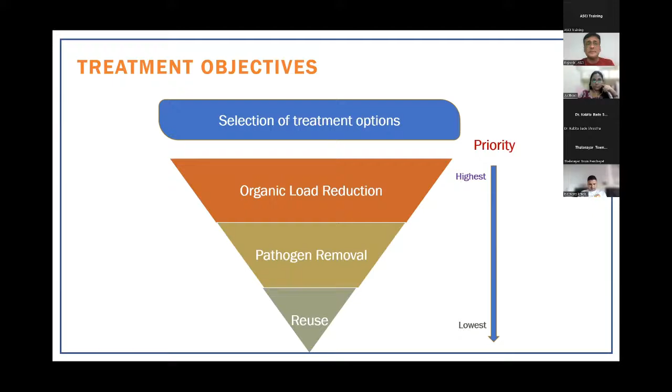So these are some of the things we look into. On performance, we look at water and solids, whether on the technical side they meet discharge norms or reuse standards. At the local context, we look into the characteristics of the sludge, then the dewaterability based on solids concentration and stabilization, designing the dewatering mechanism, the frequency a treatment plant would receive loads, and how much time it takes to completely treat after receiving a load.

If the treatment system put up is robust enough to take up all the climate changes. Land availability, we know in urban contexts, is quite a challenge, so how much land footprint would be required for a plant? And finally, what would be the end use? How will I use it? What will I do with it? That should be the ultimate goal when designing a fecal sludge treatment plant.

Talking of O&M requirements, how much human power and human resources are required, what will be the cost, and how much skill set each person working in this treatment plant would require. And then finally comes the investments, the O&M costs, and the affordability for households and the ULB to bring sludge into the plant and make it functional.

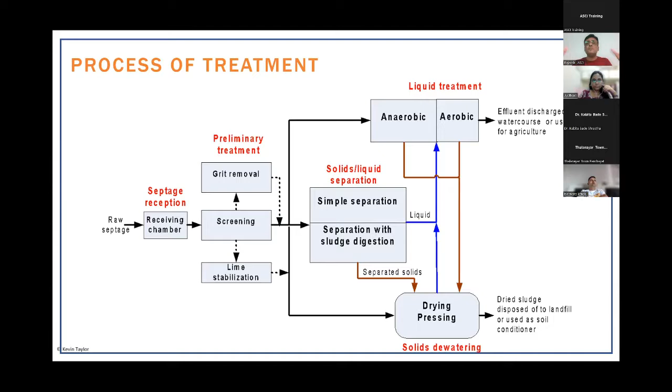It could be anaerobic, aerobic, chemical, or anything else. The solids separately will go through a chain of events where they would be concentrated, moisture content brought down, and rid of pathogens, so they can be used as soil conditioners.

That's the basic scheme whenever we design a fecal sludge treatment plant. Now, there are several processes we'll discuss today: settling and thickening tanks, geobags, Imhoff tanks. These techniques help in the dewatering process.

Post the dewatering, as it comes to treatment of the water, there are several processes: aerobic processes and anaerobic processes.

And then when the solids come up, they need to be treated. Heat drying could be done, composting could be done, vermicomposting could be done. Simple but effectively designed sun drying could be done, so that pathogen reduction is achieved in the biosolids.

Finally, the dried sludge or biosolids can be used as building materials, or for energy, biogas. But in the Indian context, we generally prefer to look into the agricultural context, where it can be used as a soil conditioner or manure.

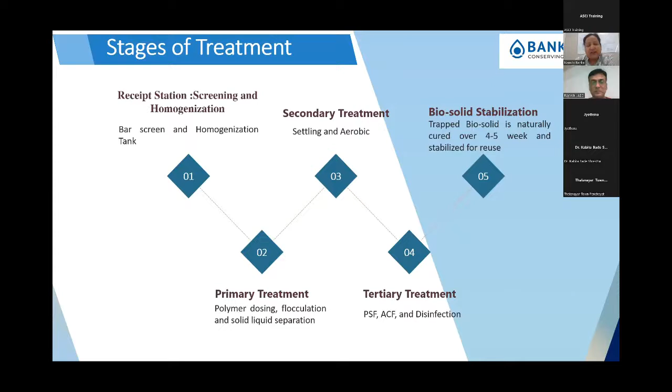So that we do, and then this whole material is passed through the geobag, where effective dewatering happens. This is our flow chart. This is the sludge, and when the water comes in the geotube, it gets separated into two parts: the solid is retained inside the bag, and the liquid is discharged outside and collected in a tank.

So it's collected in the tank. Then after that tank, the water comes out, we take it for treatment using different methods and different units that we have, where somewhere we are using it aerobically. We have tried SBR, we have tried normal, simple treatment. I'm sorry, you'll have to excuse me for my throat today. So this is what is happening when the water comes out.

We have tried different technology, aerobic and mechanical processes to treat, and we have seen that we are getting very good quality water, which is being reused in our system. Then finally we pass it through ACF, PSF, and filters to use it for our own purposes.

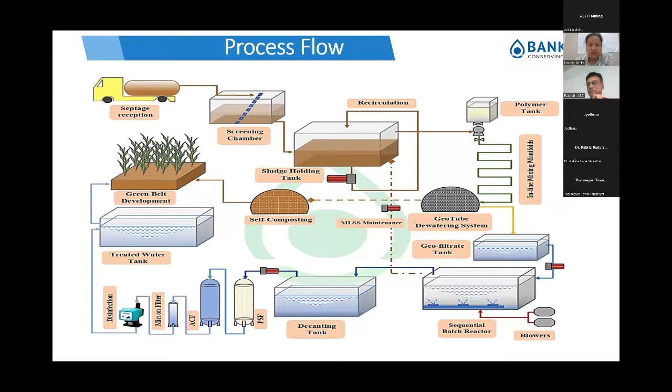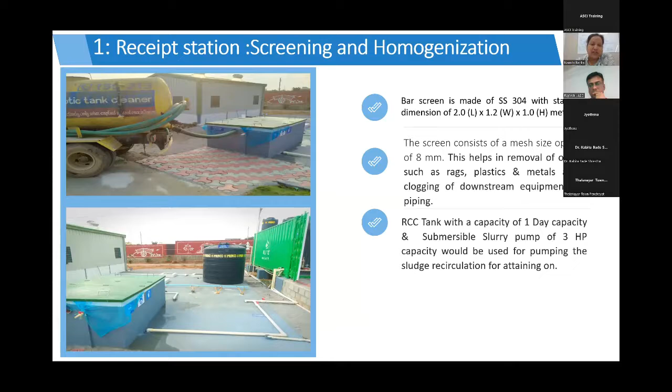We don't have anything separate when the waste is pumped through the pipe; the dosing has been done, and we call it a zigzag or anaconda kind of design, where the flocculation happens meanwhile while it is being pumped, and then this whole material is pumped into this geobag. This is how it looks when it is pumped: immediately the separation happens, the effluent water comes out, and the solid retains inside.

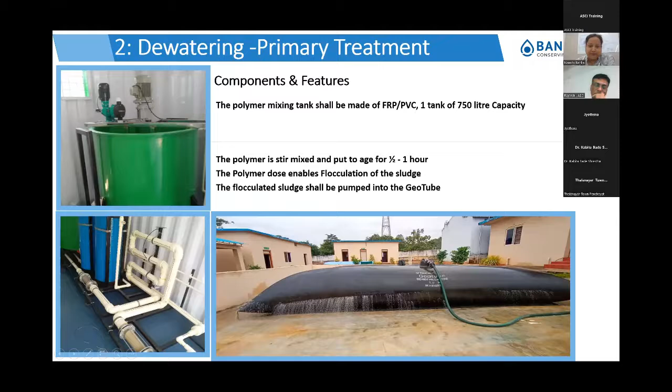Now we have started and upgraded our SBR secondary treatment. The reason is that before we were allowed norms of 30 BOD or less, but now since the norms require bringing it down to 10, we have installed a very simple SBR system, which helps us reduce the BOD, COD and maintain it below 10. It also helps us in maintaining the nitrogen levels.

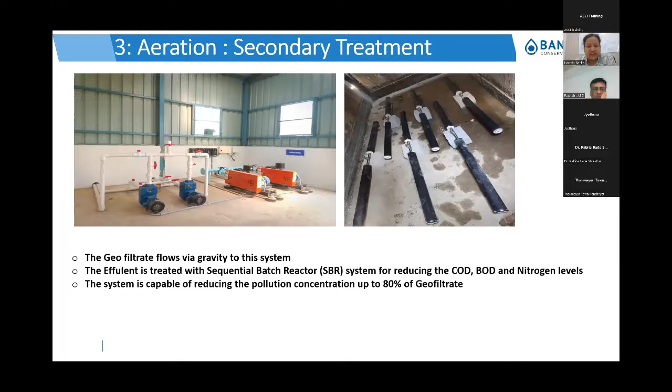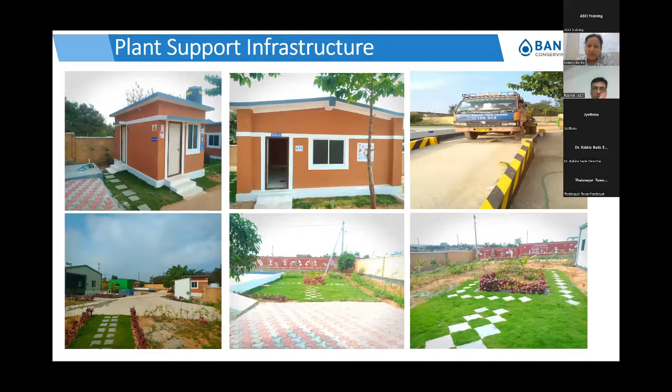So after 6 to 8 weeks, when we open up the bags, this is how it looks - completely dried solids. This solid is in a very hard rock form, so we pulverize them to a smaller size of 3mm to 4mm particles, pack it, and distribute.

Most of it has been distributed till date. We have almost generated 150,000 kgs of these solids, which have been 100% given away for free around the community, because we believe if we are able to develop the community along with what we are doing, it thrives better.

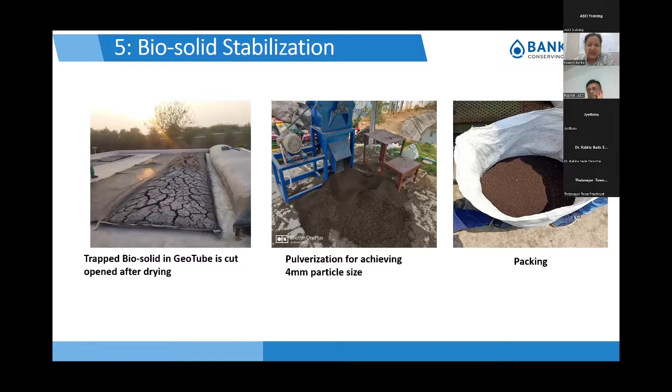And we have also used it in our own plants, where we have grown some kind of vegetables, which are very, very evident. If any one of you visit, you can get a first-hand feel of these vegetables and fruits and other things that we are developing.

So the very salient feature of this technology is that it's very scalable. There's no odor at all. The geotubes are sometimes said to be the only constraint, but we feel that's not a constraint, because something or the other has to be consumable. So the geotube can be resold - we have resold them. Discharge norms can be met very easily.

And I feel that because the requirement of electricity is so low, we can install it anywhere, even where there's a shortage of electricity. And the operation is simple, where we deploy local people locally - we don't generally send them from Hyderabad.

Installation time is very low. Here in Hyderabad and Telangana, because of so many kinds of infrastructure required, it took us 3 months. Otherwise, if you don't want all that, we can do it in 1 month to 1.5 months.

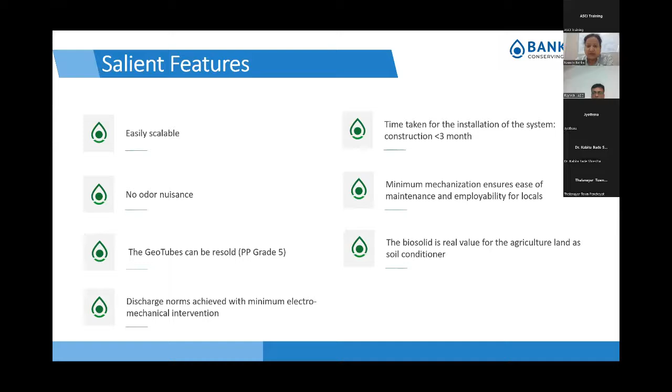So the biggest part of this technology is the USP - it can handle incoming septage of any shock loads. That means there is a lot of solid variation that we have seen in the last 4 years.

We have seen solids coming as low as 1% to solids coming as 8%. That means sometimes it's very old septage from septic tanks, which we cannot refuse to take. Despite that, we have been able to manage them, and we have not yet returned any vehicles.

With 6 or 7 of them running right now, we have almost taken 2,500 trucks in these plants and treated almost 5 MLD of waste.

It's 95% removed in the primary treatment itself. Our incoming BOD average has always been around 15,000 to 20,000 BOD, which we reduce immediately by geotube to 95% or more.

So this is a challenge that this geotube can handle, and it promises me to do that.

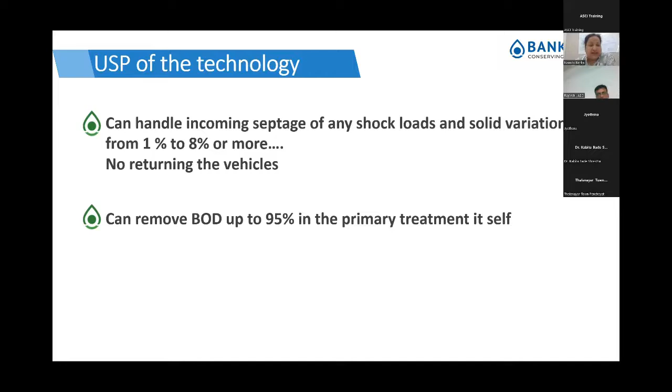So we have 8 plants in operation, 5,000 plus kiloliters have been treated. And the effluent, which we have used, is 3,500 kiloliters, which we used completely in our garden - we don't buy any water from outside. And 150 tons of biosolid has been distributed and recovered.

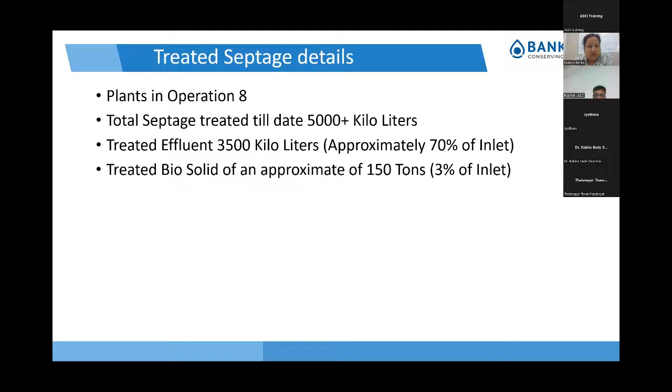So the efficiency is very clear - COD is definitely less than 50, BOD is less than 20. Why are we saying this? Because the SBR is recently installed in one of the plants where we are trying to bring it down to 10, and most probably we'll succeed in doing that. TS is 1%, SS is less than 50, and pH is maintained at 6.5 to 8.

Of course, we have done a lot of tests, a lot of studies, and had a lot of visitors across India and abroad visiting our plants. And we have a lovely plant in Bodopal, Hyderabad, which is very close to the city and beautifully running.

So just to give some background about the company, we are a public limited for-profit social enterprise providing sanitation solutions to one and all. We call ourselves an integrated sanitation solution provider, from containment to the reuse or resale of the fecal sludge solids. We have been doing it.

We were incorporated on 31st August 2012 in Hyderabad. Of course, I'm the founder, but we have a lot of team members who help me do all this. We have been a member of many recognized global organizations, and some of our directors have been part of these organizations, taking them to the next level, and giving a lot of presentations across.

We have 900 employees pan-India, because we do a lot of business with Indian Railways. We have offices in Hyderabad now, and we have 6 regional offices across India. We are a public listed company and are trading.

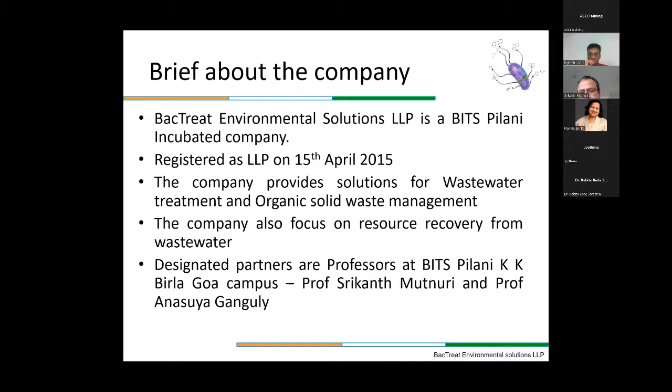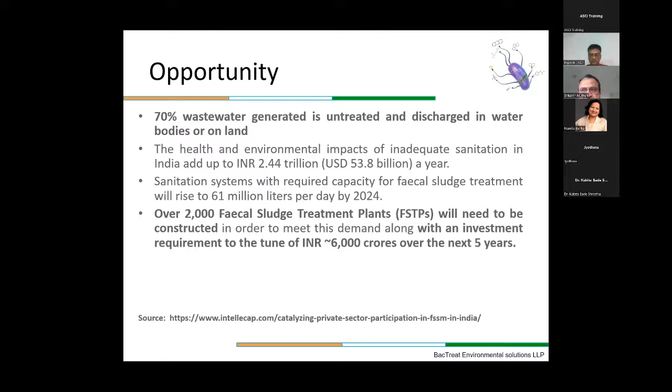Now, urine is rich in nitrogen, phosphorus and potassium, as well as the feces. And that comes in the wastewater, which is the focus of our work, to trap them as nutrients. Now our way of producing manure is a little different, so it's a better quality manure than the regular organic manure.

Even though it is in the same region, when people looked at what was done in those days, like carbon dating and other analysis, scientists found that the way waste was disposed in the Amazon region was different, and they brought in some additives into it. All the waste was added in a particular manner, including fecal matter, dead bodies, and organic waste - everything was dumped in one area. Then they brought in some broken earthenware and ceramic units, and some bacterial cultures were also found in that.

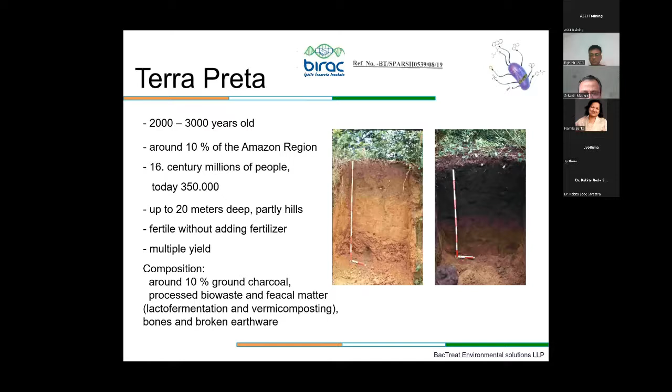And we consciously took a decision of not using electricity or any type of running motor, etc., because we wanted the system to work in any conditions, and we rely mostly on the gravity base.

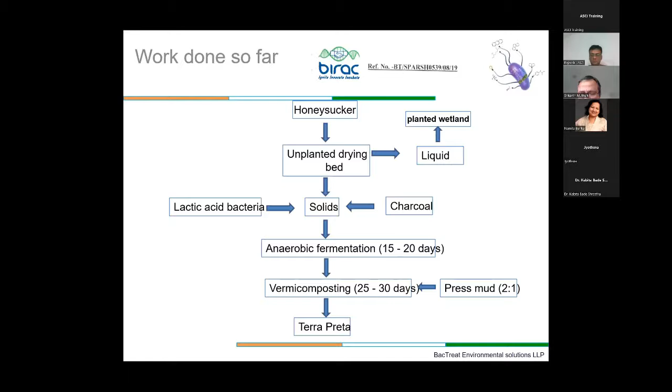So the honeysucker or the septic tanker comes in, they pour it in an unplanted drying bed, the liquid and solids are separated, then we go in for a sort of fermentation which we optimized, and post optimization we go in for vermicomposting. And then we do some additives, and then we make it a rich compost. I will show you the video of how it is done.

And we follow this terra preta quality in terms of the different parameters to match with the fertilizer control order, as well as we look for the heavy metals in it. So we match that all the parameters match with the fertilizer control order, and this is how it looks.

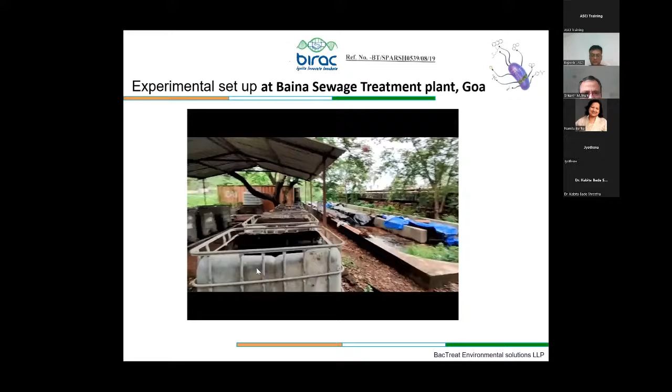This is a plant which manages one septic tanker per day, which is 8,000 liters per day. We have been operating this for 2 years, every day one septic tanker.

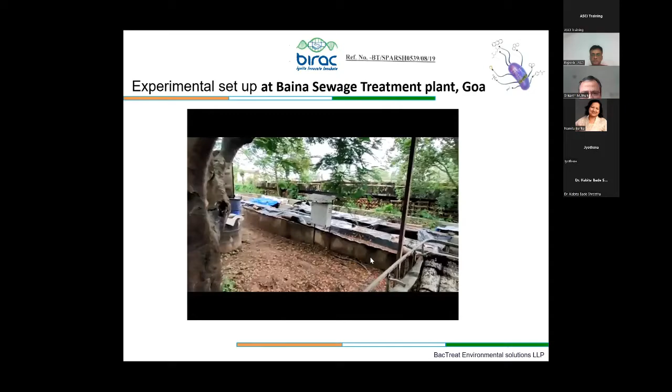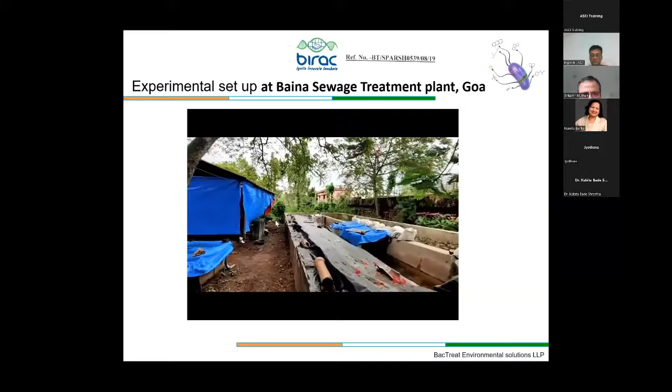So these separates and the solids are composted in these black color sheets. What you see is the composting bins underneath. And the video was taken during the rainy season, that's why you see the covers hanging. And so these are the composting bins, and those packed bags with the compost are there.

And this is a unit where the end product compost is sieved and bagged. And behind these are the composting bins.

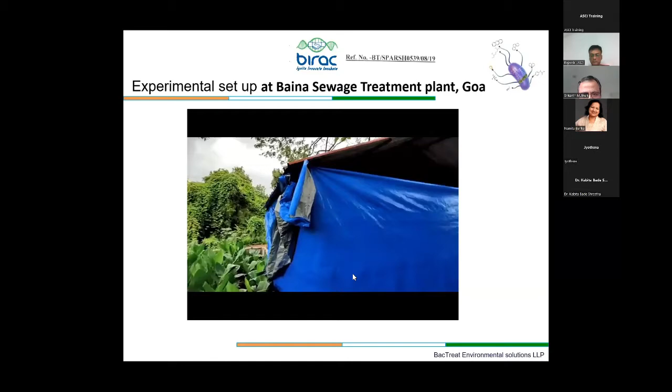And this is the vertical wetland which treats the water. So our wetland system has an advantage that it occupies lesser area compared to the other wetlands, because it's an in-house developed vertical flow constructed wetland compared to the horizontal systems. It occupies less area.

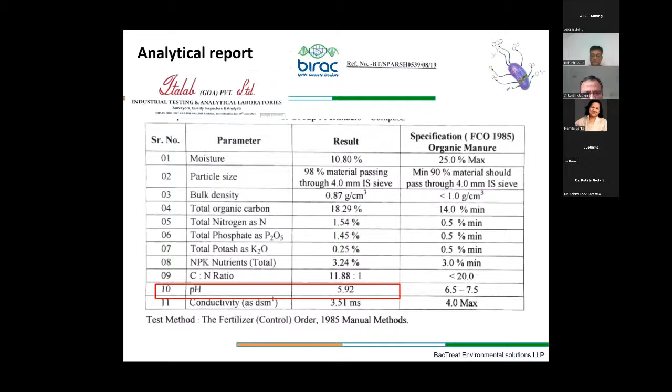Then we look at the different parameters and we see that it matches the FCO order. For example, here if you see the pH is low, because of that your potash is low. So then we go in for an addition of ash into it, to bring in the potash, and which will adjust the pH as well.

And so the cost economics is about 5 rupees for compost production. And the COD parameters are well within the discharge standards, and the coliforms found towards the end - we do hypochlorite addition towards the end, but we modified that according to the situation. Like we integrated in one condition a UV disinfection system. In some cases we have integrated an electrochemical based disinfection system. And here in this case, we rely on the hypochlorite system.

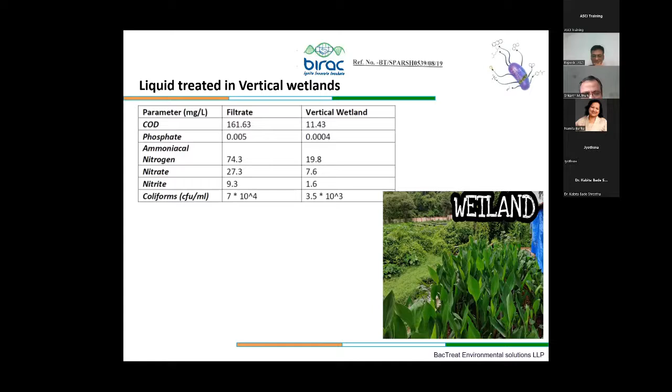So we did further studies. All these are BIRAC sponsored ones. We are into the field now.

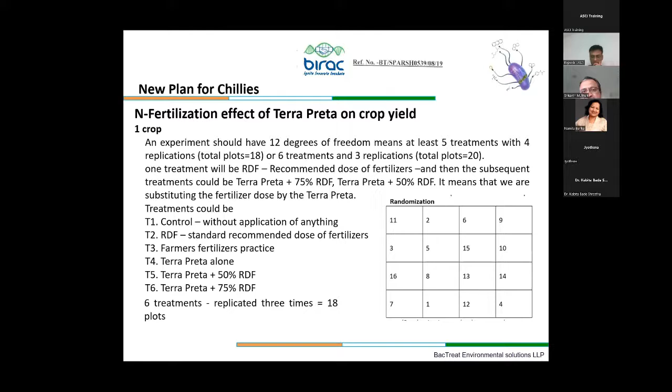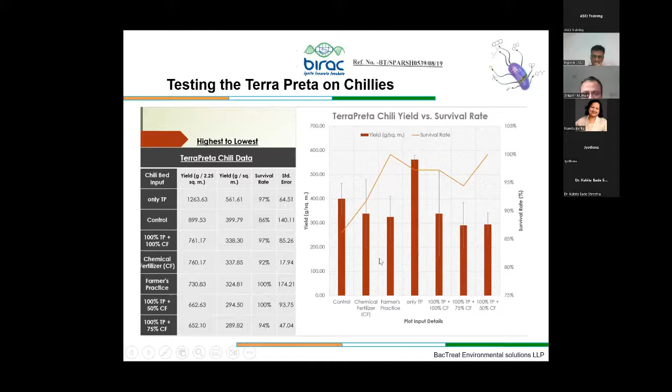And what we have done is we tested the compost that is produced. As I said, we have been operating that for now almost 2 years, and every day 8,000 liters of septic tanker content is processed, from which we get roughly about 300 to 500 kgs of manure. So we tested it on different plants - one is chili, as you could see. Then our terra preta, the middle one, you could see that performs better in comparison to chemical fertilizers or farmers' practice.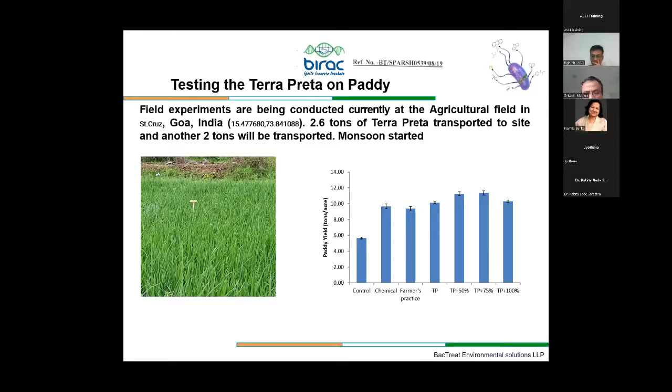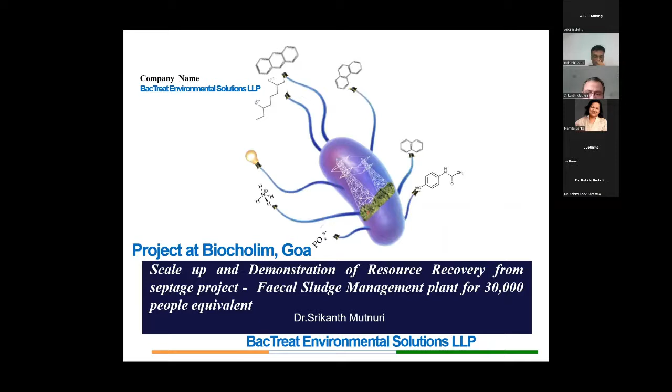So we did these crop studies with our manure, and we constantly monitor the manure quality. Now we've scaled it up to manage 15 septic tankers per day in another municipal council in Goa, the Bicholim Municipal Council. We can install this anywhere.

So this is the inauguration of our 15 septic tanker per day unit with Bicholim Council. Let's see this, so that's the whole unit, and let's look at this part.

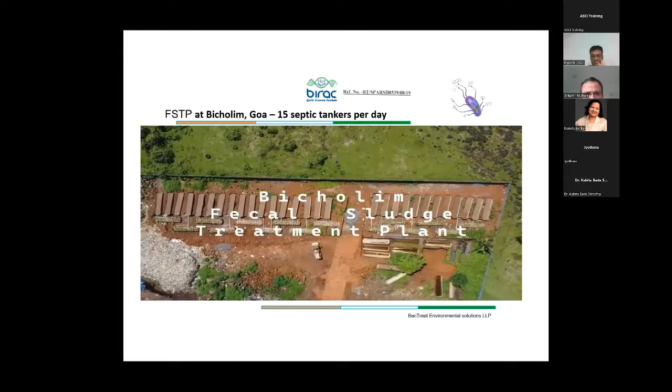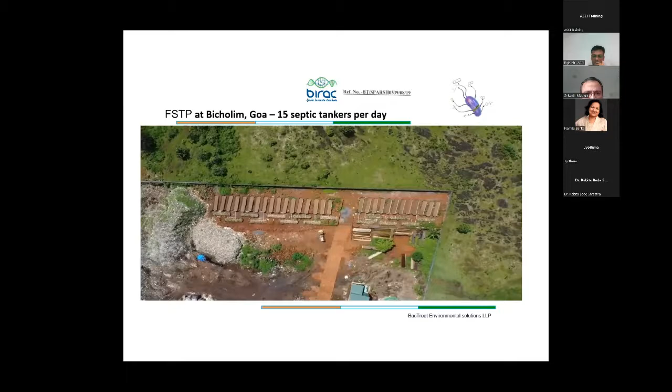So that's the 15 septic tanker, 90 to 120 cubic meter per day unit. This whole area is Bicholim Council's municipal solid waste treatment plant, and they gave us space there, which we're using for our treatment unit. So the septic tanker comes in.

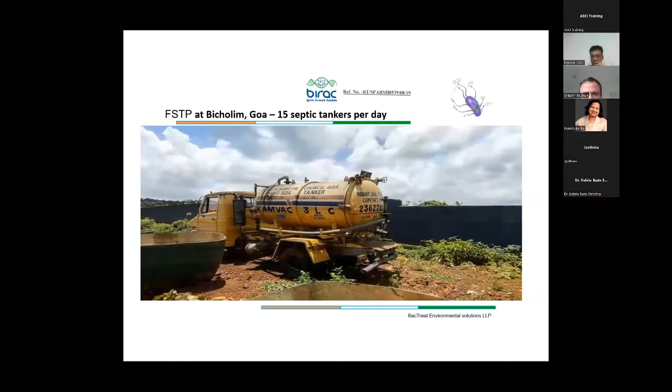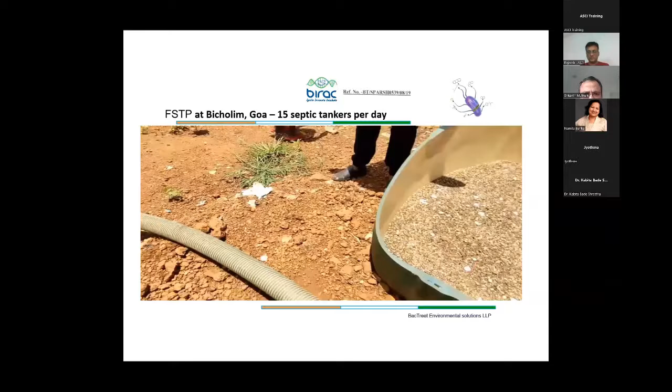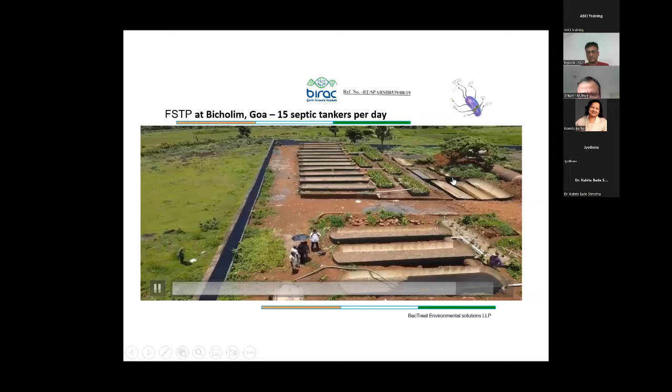They discharge into these unplanted drying beds, and the green color you see is the wetlands. After separation of solids and liquids, the water gets treated in the wetland and then goes further. The black color is the solids, and the plants treat the water, and then there's a collection tank of water.

So that's the gist of what we do with the fecal sludge management, and I'll be happy to take questions.

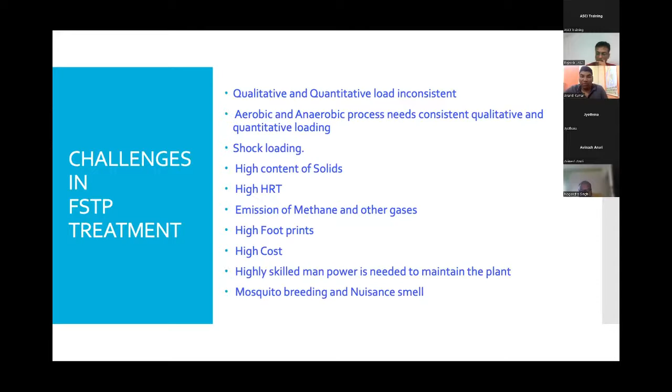At the same time, it required high HRT, meaning high footprint. Cost was incurring high. To maintain such plants, I was requiring highly skilled manpower. Mosquito breeding and smell was another challenge.

So to counter all these challenges, we came with a solution: a screw press dewatering machine followed by electrocoagulation. This helped me to treat the sludge immediately, and it can handle a wide range of qualitative and quantitative loadings. If there is no load, no problem. After a week, if I receive a tanker, I can just switch on the button and start the treatment.

If the BOD or organic content is high or low, absolutely no problem, because it has got nothing to do with bacteria initially. So that has really solved bigger problems. I require very less footprint, and in the entire treatment process we are not generating any kind of gases.

We are also integrating the entire system with solar and wind renewable energy, helping us make the whole system independent of power and grid. The treatment is completely green because we are not emitting any gases. It is cost effective, and I don't require highly skilled manpower to operate such a plant. Ultimately, no smell in the plant, and the treatment can be done under a clean and green environment. This is the solution we came up with to achieve this.

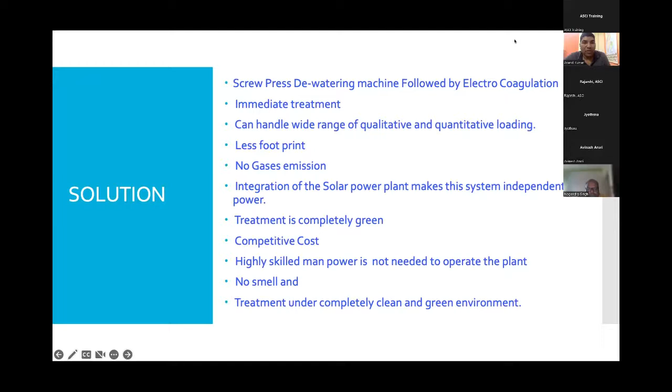To achieve this, the process we followed was like a screw press. Next slide for the process flow.

So this is a screw press where we feed the sludge inlet. You can see there is a vent nozzle, the sludge inlet. From there, the entire sludge can be taken, and we can separate solids and liquids. There is a filtrate outlet and a sludge outlet. These are the two outlets. Solids come out from the sludge outlet, and liquid comes out from the filtrate outlet.

The features are: we can start the treatment immediately after the decant. Solid-liquid separation can take place instantly. All discrete particles present can be removed immediately, the same day, the same hour.

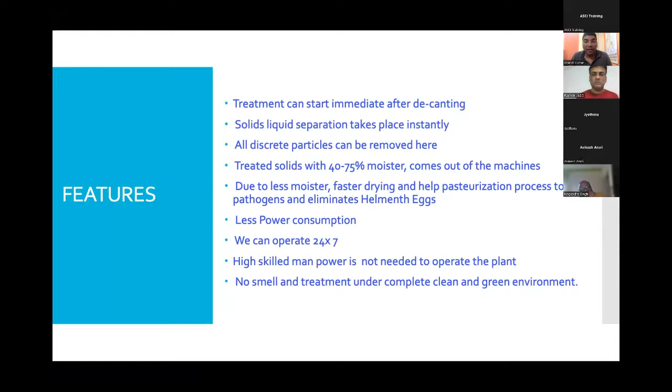Whatever solids come out of the dewatering machine have 40 to 75% moisture, and due to the less moisture, drying can be faster. It helps the pasteurization process, killing all the pathogens and eliminating the helminths. It requires very less power, and we can operate such a machine 24/7. To operate it, highly skilled manpower is not required. No smell is there, and it can be treated without any gas emission.

After that, there is an electrocoagulation system. The water which comes out of the dewatering machine goes into electrocoagulation. That water is already free from all the discrete particles.

The only constituents present in the wastewater are at a very micro level, and they have a bond with the water. For these constituents, electrocoagulation helps in breaking the bond and separating all those suspended solids which we cannot see with the naked eye, through electrocoagulation.

Here we have two different kinds of electroplates. We provide DC supply to the plates, which leads to ionization within the water. Due to this ionization, the release of metallic ions and electrons react with the constituents, and that breaks the bond with the wastewater.

The moment it breaks the bond, it starts coagulating. With respect to its density, if it has less density, it floats over the surface; if it has high density, it precipitates and forms sludge at the bottom of the tank. So we have a mechanism to remove the floc and the sludge. We can drain these two things in parallel and take those solids back into the first tank so it can go through the dewatering machine again.

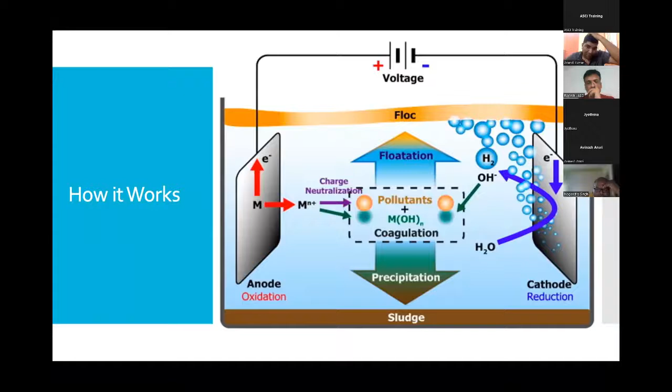So the features: as I already mentioned, the treatment starts in situ, and after the dewatering machine, the water can immediately go into the electrocoagulation system and treatment can start. It breaks the bonds between the constituents, the pollutants, and the water, and it kills all the pathogens. The water comes out treated because we are giving DC potential to the water, so it kills all the pathogens.

We have a provision to drain the flocks and precipitates, so all the solids can be brought back to the first tank. High COD, BOD, TSS, nitrogen, and everything can be treated conveniently. It is completely independent of shock loads, with no smell during the treatment.

It has a wide range of applications. We can use medical waste liquid, industrial waste liquid, along with fecal sludge. So we are the ones who treated fecal sludge with electrocoagulation.

This technology is very old, already existing in the industry. Mostly it has been used in medical and industrial applications. We are using it for fecal sludge applications, and we have made certain modifications and upgradations that have given fantastic results.

This system can also be integrated with IoT, which helps in monitoring the parameters and controlling the flow.

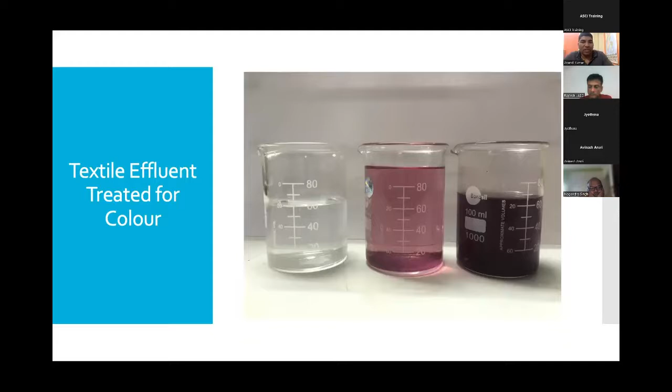This is how we have seen the treatment. This is another application, not for fecal sludge, but even in dye applications we have seen good results.

This is how a smaller unit looks, with a little higher capacity.

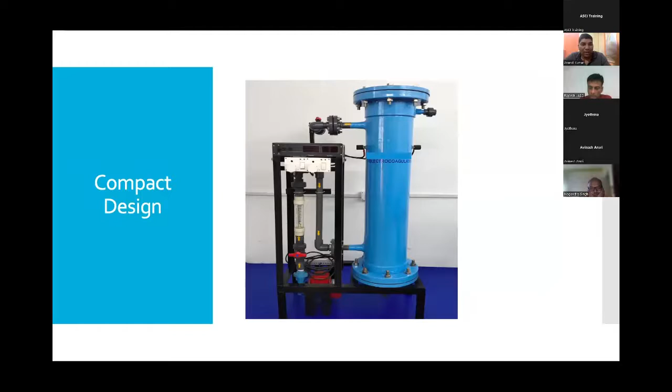This system can treat very small volumes, very compact. This can treat up to 1 cubic meter per hour.

After electrocoagulation, to build confidence in the water quality, we have a contingency in all our plants with an MBBR plant, which I have not displayed since it is known to everyone. After MBBR, the water passes through carbon filtration and sand filtration, and again we have UV for additional disinfection of the water.

We have been operating these plants in various places like Khammam, Nalgonda, Aiza, Gadwal, Mahbubnagar, and Palamner. Everywhere we have experienced very good results.

All solids being treated in the pasteurization process, we have seen, are completely free from pathogens and helminths.

Right now, whatever solids we have been producing, the municipality is taking and using them for local plantation. Whatever water comes out of it, we are using for in-house gardening purposes.

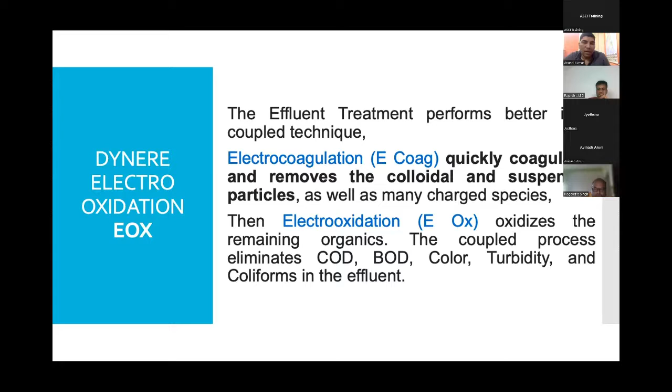I hope I am clear on electrocoagulation and the dewatering machine. Please let me know if there are any queries. Thank you.

There is a question from Mr. Nagendra Singh: can this electroflocculation work on grey water to remove dissolved detergent and other cosmetic items used at the household level?

Yes, we have tested this as well. What we have seen is that whatever detergent and cosmetics are present are also removed. We have tested that and we have test reports and all. So yes, it can be done.

The next question is, what is the cost of the treatment unit per KLD, and what is the O&M cost per KLD? A rough estimate, if you could give.

If we keep it very specific to the treatment, not considering support infrastructure and all, machine to machine, the maximum is about 3 to 3.5 lakhs per KL, max.

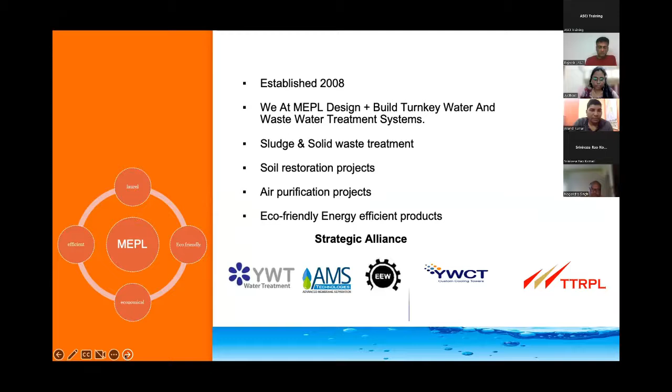That was the IoT and other things we have implemented. Ma'am, you just keep going down so that... yeah, Avinash is handling the slides. Okay, Avinash, you can go to the process.

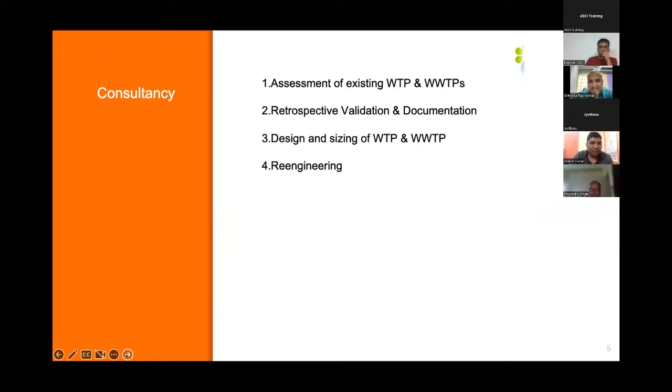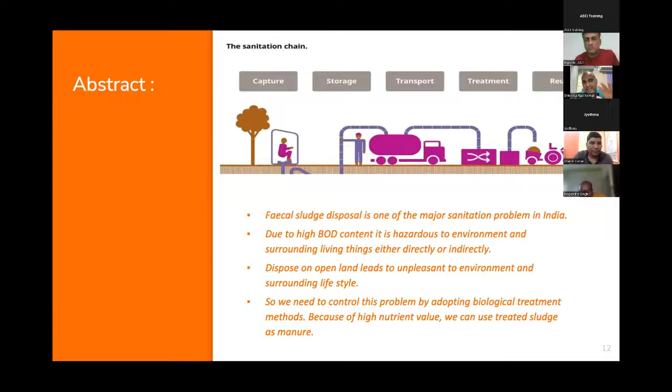This is about our abstract. We know the BODs, CODs, and the pathogens, elements, everything has to be removed. But in concept, how we design the system, we just wanted to keep the premises, operators and everybody very safe, even during the treatment, so there should not be any spillages, any leakages, and we wanted to avoid any direct human contact with the untreated septic at any point of the treatment time.

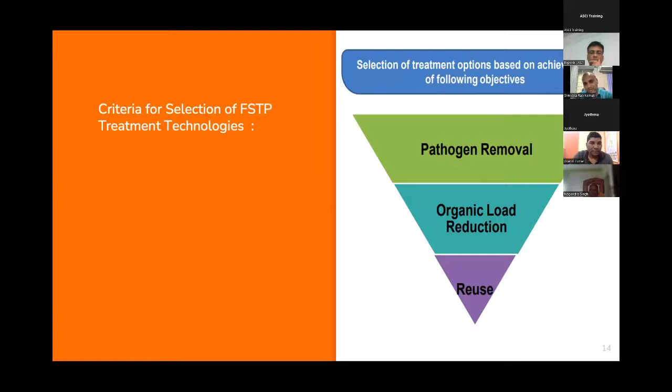So this is the method we wanted to design: the spillage should not be there, it should be the proper design, and the technology should be innovative, and it should treat both the liquid and the solid stream, and both should be recyclable.

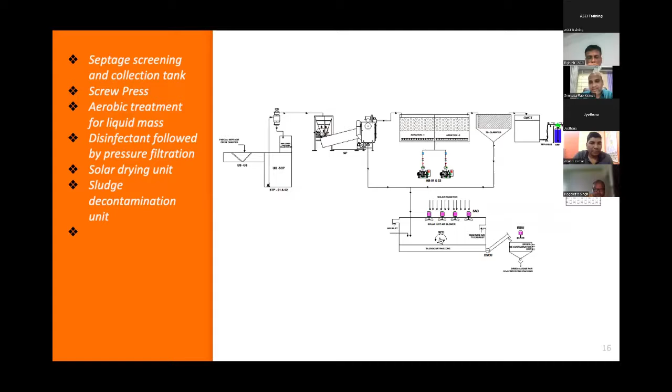This is a P&ID system. The unit operations we mentioned clearly: initially there is a screen chamber, and we have a collection tank, after that a solid-liquid separator, then liquid treatment, then solid treatment and filtration. Everything will be there in the flow diagram.

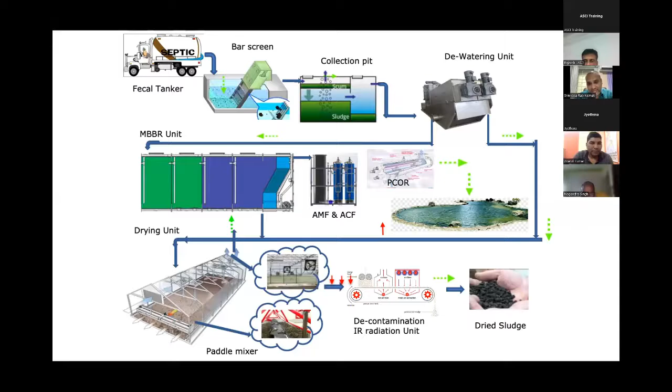Yeah, here. So when this atmospheric air enters into this drying zone, because this polycarbonate sheet allows solar radiation, natural solar radiation into the drying zone, that will heat up the atmospheric air.

That air will be blown onto the sludge blanket which is on the floor, and we have a paddle mixer. That paddle mixer will spread the sludge uniformly on the floor of this drying zone, and it will expose the sludge to the dried air, so that the drying will be speeded up and proper drying will happen.

The moisture content will be reduced properly, and after that this dried sludge is taken to the next stage. You can see some videos here showing how it happens.

Then after moisture content removal, there is a potential for helminths and harmful pathogens. So we want to make sure eradication of the pathogens happens, because we want people to be able to take and touch this dried sludge with bare hands. That is done by infrared radiation and the heat effect on the dried and pulverized sludge.

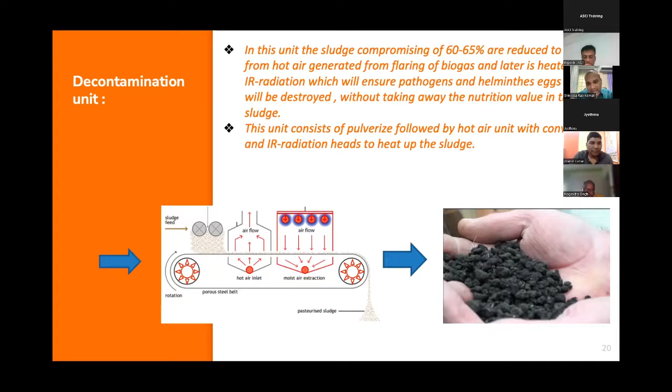With a proper residence time, all the pathogens can be eradicated. That dried sludge can then be kept and used for manure applications.

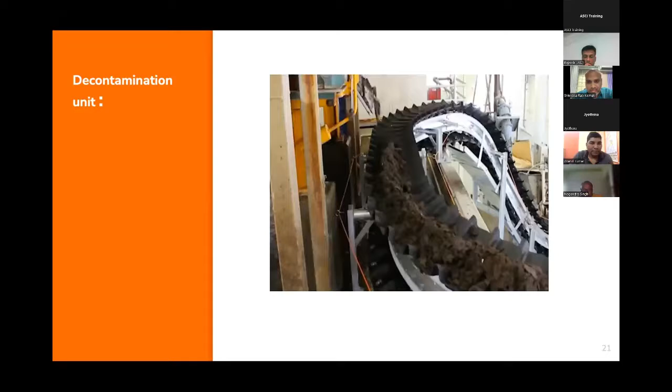These are a few pictorial representations of places like Kamareddy and Uppal in Hyderabad where we have done these FSTPs.

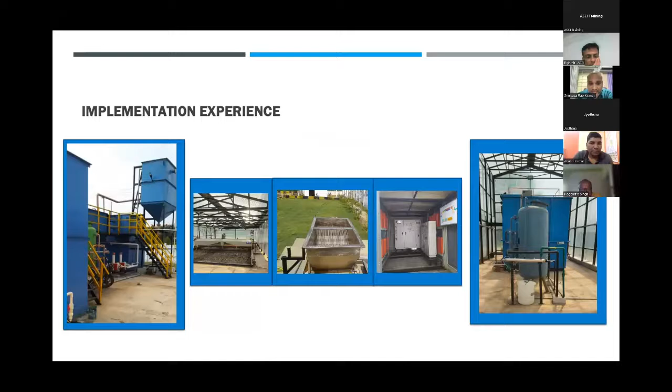These show a few unit operations: the bar screen chambers, the electrical panel, the liquid treatment area, the sludge drying zone, and the solid-liquid separation at different places.

In our Uppal plant, people visited and saw how the premises were maintained, and the solid-liquid treatment, where the treated liquid and treated solid are recycled in-house to the garden we are maintaining there for watering.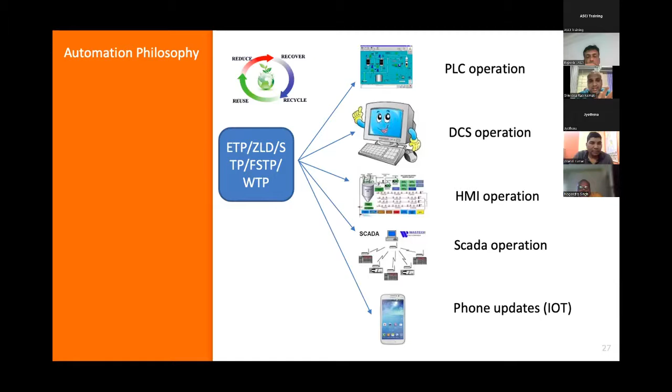Most predominantly, the beauty of this system in Uppal and other places is that we have adapted automation, with PLC operation, and we can go with DCS, but here we have PLC and HMI, and mostly an IoT system, to minimize manual intervention so that we can control, monitor, and operate the plant remotely from anywhere in the world. That was the application of IoT we are adapting for all the FSTPs.

Thank you very much.

Thank you, Mr. Srinivas. There are some questions. I would take one or two questions. There's a question from one of our Sri Lankan participants: what is the efficiency of decontamination of the IR unit? Is it better than heating the sludge? Any kind of comparison you would like to speak about?

IR is simply radiation. Let me complete the question first, he has a continuation to that: how small should the sludge particle be before decontamination? Will the heat be transferred to all parts of the sludge? What is the heat maintained in the IR heating system?

Exactly, so it's a continuous process of unit operations. In the drying zone we have different drying zones. In the solar drying zone, after the last drying zone, we have pulverizing conveyors, and after drying we pulverize it into 2 to 5 mm, 5 to 6 mm diameter size pellets formed after pulverizing.

That pellet is taken into the IR radiation zone. It's a radiation zone, simply radiation, we are not going beyond a hundred degrees temperature, we are going up to below 100 degrees only. But what we are ensuring is the residence time and instantaneous radiation, and it penetrates through the core of that pellet.

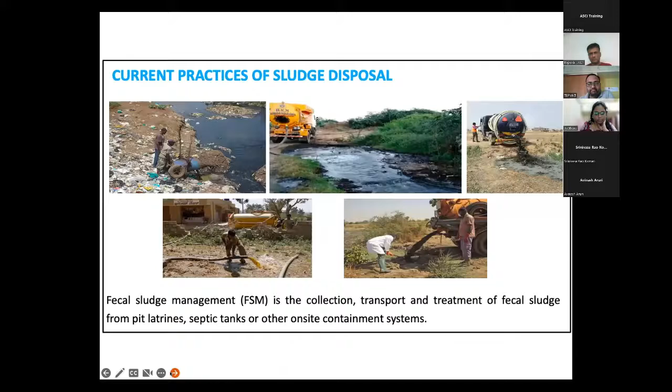The treated water is applied to the Tiger Biofilter 2 bed, and from this second Tiger Biofilter, this treated water is collected again into the filter feed tank. Then filtration is there through PSF and ACF, and the last step is chlorination for disinfection.

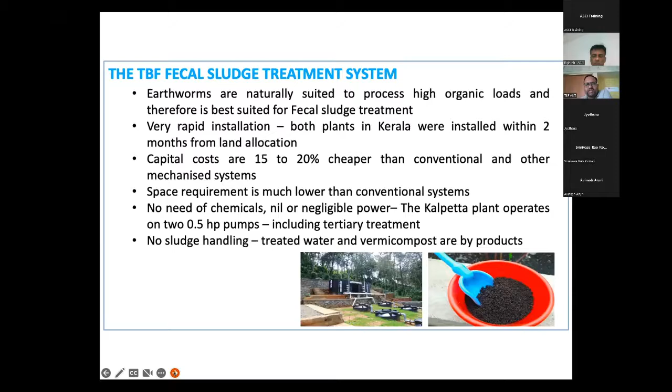The advantages of this technology: it is 100% natural, high energy saving, easy operation - any unskilled worker can operate this. Area requirement is very minimum. It's a one step process that rapidly treats the fecal sludge, and vermicompost obtained is the byproduct. These are photographs of the inlet of the sludge up to the final outlet.

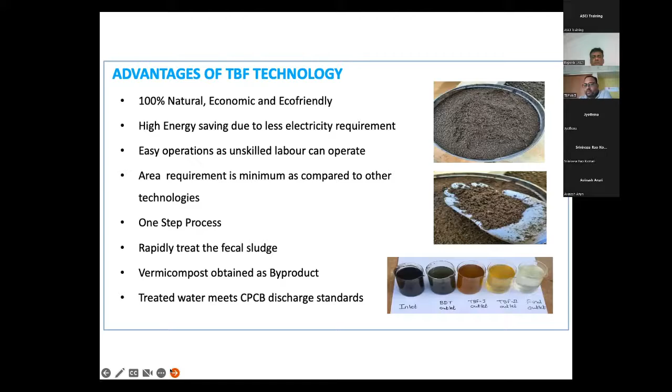So up till now, we have completed these projects, some ongoing. The maximum capacity installed is 32 KLD, and minimum is 5 KLD. We have installed up to 32 KLD FSTP plants based on this technology all over India.

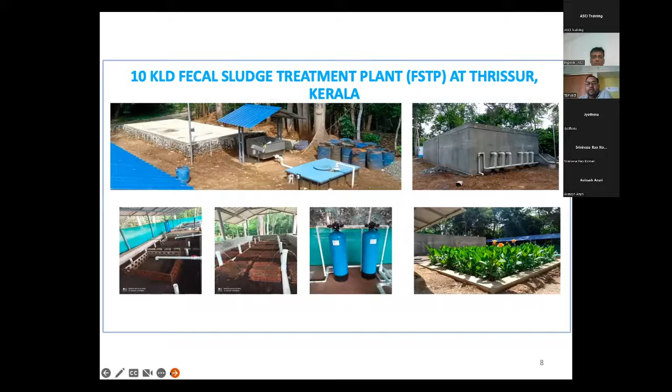These are some of our installations. These are photographs of the 10 KLD fecal sewage sludge treatment plant at Thrissur, Kerala. We can see these are the beds, this is also a bed, and this is the filtration unit.

This is the plant at Kalpetta, again a 10 KLD capacity. These are photographs of samples. This is a series of 3 tanks, an anaerobic sludge reactor. And this is again a 10 KLD FSTP plant at Malkapur, Maharashtra.

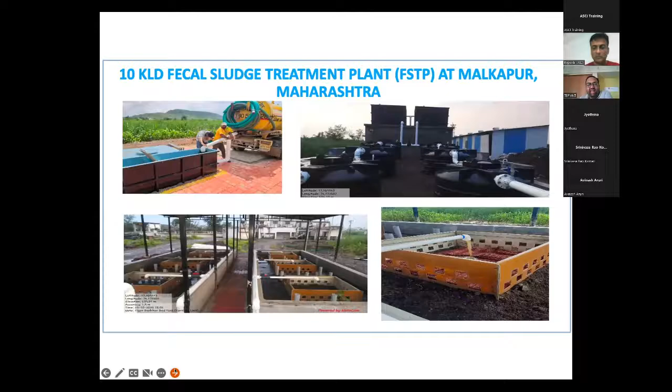Next one. This technology is proposed by the Department of Drinking Water and Sanitation for fecal sludge management plants using the Swachh Bharat Kosh Fund. So we are doing projects for villages having funds under the Swachh Bharat Kosh Fund all over India. Next one.

This technology is empaneled by the Government of India, Ministry of Jal Shakti, and under the Swachh Bharat Mission we started about 50 projects of FSTPs at different villages under this SBM.

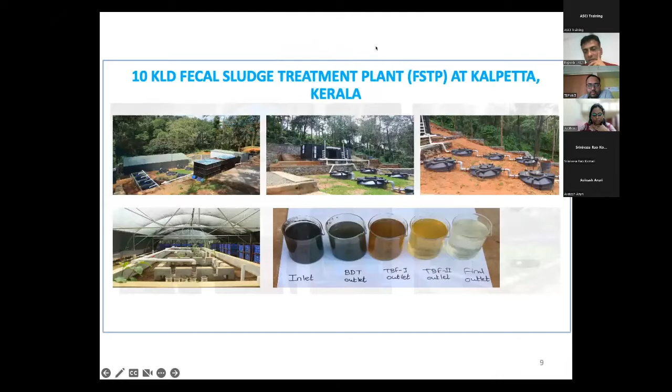Please, Nagendra Singh ji asked how the performance can be affected if we place normal worms or without worms. In the initial stages, we checked different species of worms, but we found this specific tiger worm species of earthworm more effective to consume the human waste.

So with other worms, the decomposition time will be more, meaning the sludge application rate will be less compared to tiger worms. Basically, either there will be a bigger size requirement of the tiger biofilter beds, both the beds.

So this worm is different than what we use in the vermicomposting of cow dung? No, this is again different from what we use in vermicomposting. This is a species identified which is efficient for consuming human waste, basically.

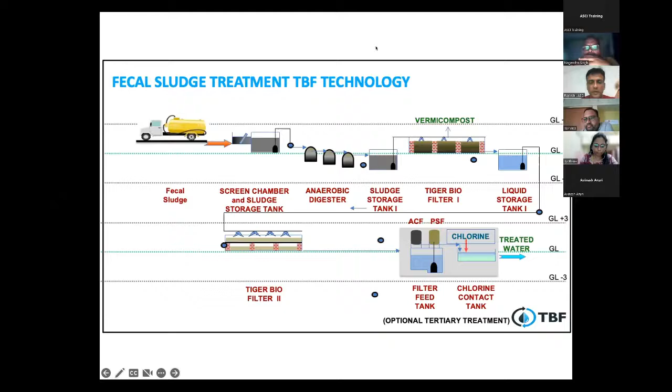This is especially developed by our agency, and in our lab we are breeding these worms. Can we pull down the slides and then have the discussion? Yeah, thank you.

Yes, Professor Chari, may I welcome you to carry on the discussion with all our concessionaires and presenters today. One of the questions Mr. Nagendra Singh asked, Namaskar sir, is whether these tiger worms are a sort of patented one, or can anybody approach you? How does it work, sir?

Tiger worm is not patented, it is an available species. It is not invented by us, but the technology and the design is patented. The integration is sort of ours. Okay.

So thank you very much. It's a way of showing how mature the sector has become in a very short span of time. In the last 4 or 5 years, different thought leaders in the industry have come together, used their own expertise to integrate different technology unit operations, and come up with very localized, very practical solutions. I think this is the best part of what you have seen and witnessed in the last 1.5 hours.